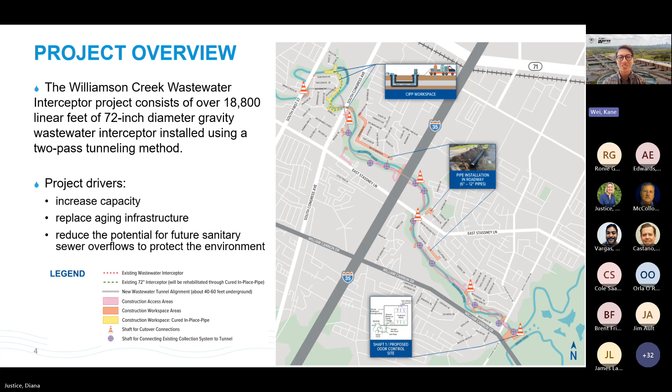Some of the major project components for the Williamson Creek Wastewater Interceptor are, again, excavation and support of 18,800 linear feet of a two-pass tunnel through rock formations of Taylor Group, Pilot Knob Group, and Austin Group. With that tunnel will be an installation of 18,600 linear feet of 72-inch fiberglass reinforced polymer mortar pipe, FRP pipe, and then 200 linear feet of 84-inch to tie into the existing tunnel there.

There will be 6 operations and maintenance shafts finished with large diameter precast polymer concrete manholes. About 10 connection shafts finished with fiberglass manholes, and this will be to allow for tie-ins and reconnections of the existing local collection system into the new tunnel. And then 1 downstream connection shaft with a structure on the 84-inch Williamson Creek tunnel. So that's the 200 linear feet of 84-inch tie-in that I was referencing.

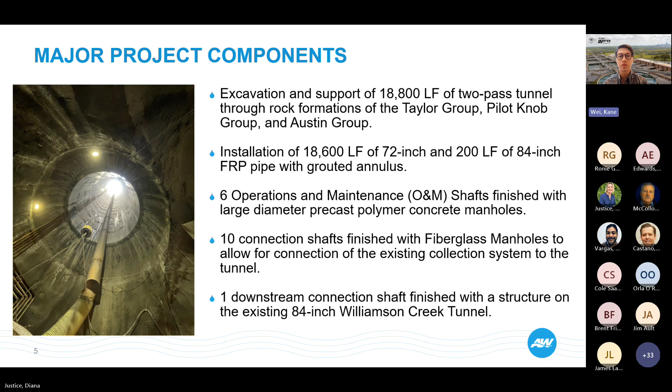The tunnel is anticipated or proposed to be about 40 to 60 feet deep, just depending on where you are. Those are the depths that we're looking at. Next slide.

Some other major project components aside from the tunnel is the pipeline installation of these cutover reconnections I was mentioning. So we do have upwards of 20 or so different cutover reconnections that we have to make to provide service to the local sewer lines.

There's a combination of construction methods from open cut and various sizes from 8-inch to 48-inch, as well as jack and bore propositions for jack and bore construction for 12-inch and 54-inch lines. And this includes furnishing the manholes, bypass pumping, and other utility adjustments.

We also wanted to highlight there's 2 large vortex insert structures that'll be used to take flow from a higher elevation to a lower in the same manhole. So please be aware of that.

There's also included in the scope removal and abandonment of existing wastewater pipelines and manholes in the creek. So you can see in this photo on the right-hand side that the existing interceptor as well as the existing wastewater laterals that tie into the interceptor often are exposed, or the encasement is exposed, or we have exposed manholes.

So with the proper removal of this abandoned infrastructure, we want to go in and clean those up so the creek can sort of be restored. And so that's included in the project scope as well.

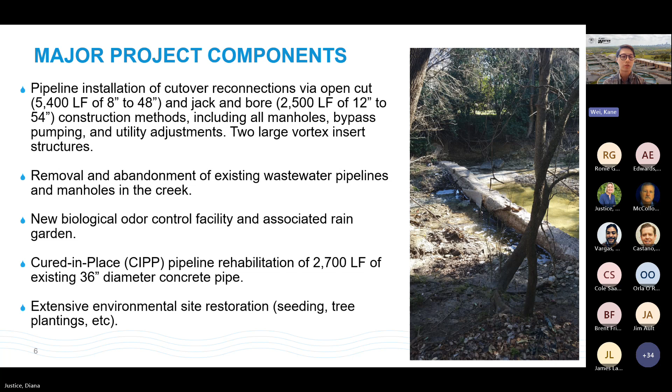And then finally, a large amount of environmental site restoration, seeding, tree plantings, things of that sort in the riparian areas, as well as offsite tree plantings to satisfy our tree mitigation requirements. Since most of this work is happening within the creeks, we are desiring to do a proper site restoration of that as well. Next slide.

Some other construction considerations for this project. Like I mentioned, the project is located primarily within Williamson Creek, and so there is a large use of easements on private property as well as parkland, and most of that access is not paved, and so we'll have to factor that in to get into the site for construction, as well as abandonment of some of the existing infrastructure that we're taking out.

There's also a good amount of community involvement that we've garnered for this project, as well as heightened attention on use of parkland and certain historical watershed buyout properties. And so there is a certain public perception, and we're trying to work and partner with the community here to improve the infrastructure. But this creek has neighborhoods, apartment complexes and buildings adjacent to the creek and the work sites. So that's just something that we want to point attention to.

Along with that, there are some other public projects nearby, things like storm drain improvement projects, trail projects. And so we've coordinated during the design phase to factor these in, factor in restoration of any impacted projects. And we've tried our best to not affect any timing of those projects, but there is a chance that some projects may occur simultaneously, though we don't anticipate any major conflicts with the schedules of those other projects.

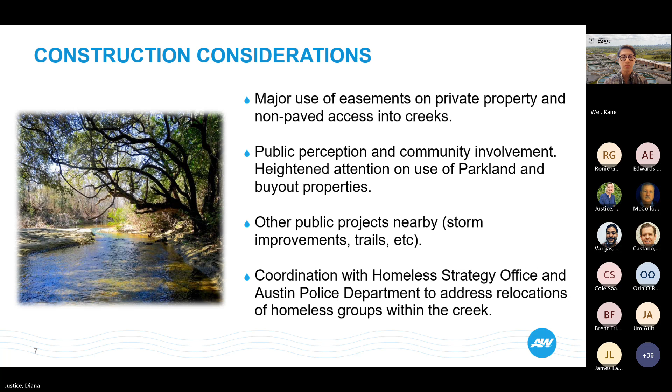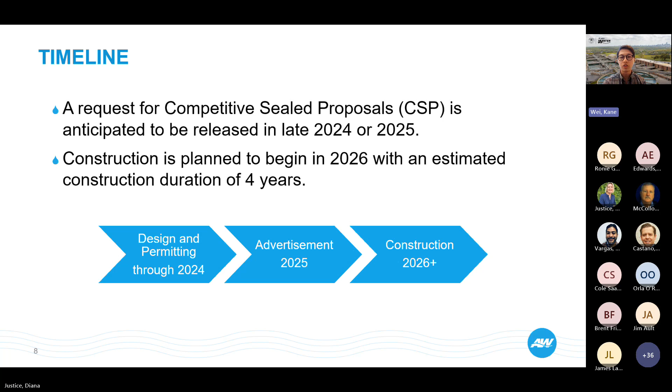Here's a timeline for our project. We're currently in final permitting stages right now and anticipate that to occur through the end of this year. And then a request for competitive sealed proposals is anticipated to be released later this year or sometime in 2025. And then construction, we're planning to begin in 2026 with an estimated total duration of 4 years. Next slide.

And here's the website I was referring to. It's www.austintexas.gov/WCI. And on that site, it's public facing. It has project details, maps, and exhibits that we've shared today as well as in the past. We have past presentations on there, and this presentation will also be uploaded on that website.

One thing we're really excited about is sort of a virtual site visit. We've flown a drone over most, if not all, of the surface access points, the cutover connections, the shaft site locations. We've flown a drone over during the summertime and in the wintertime. And so we have a sample video here if we can play that.

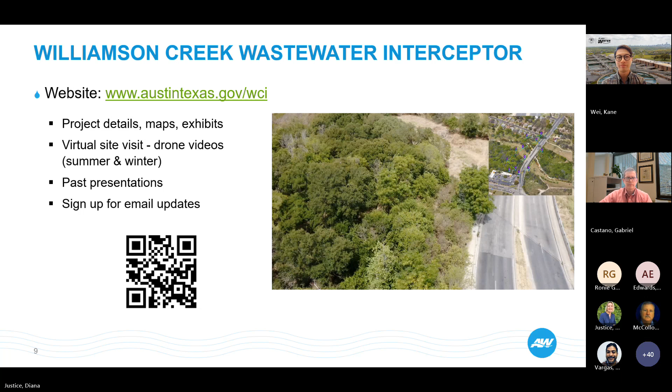Thanks, Kane. As stated at the beginning of the presentation, my name is Gabe Castano, and I'm a project manager with Capital Delivery Services, and I'm also the project manager for the McNeil Drive Water Transmission Main project. Steve Vargas, he's on the call, is the Austin Water project sponsor for this project.

So just to remind all the viewers, these two projects that are being presented at this open house are separate and will be bid separately. But we're utilizing this time to make contractors aware of these two City of Austin opportunities that will be going out for bid soon. Next slide.

So the McNeil Water Transmission Main project is located in the northwest area of the City of Austin, off US 183 and Palmer Lane. We're planning for the construction of 8,500 linear feet of 72-inch diameter pipe, either steel pipe or PCCP, constructed by tunneling methods with one launch and one retrieval shaft.

Currently, the project status is we're 100% complete with the design. We're just waiting for our general permit, so that way we can go to our financial services department to solicit this project. Next slide.

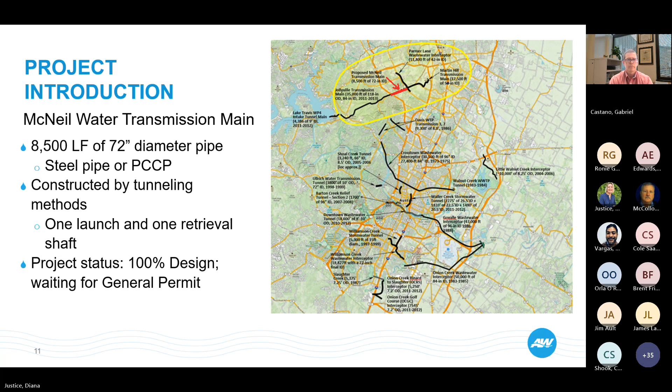So what is the project motivation? Well, this project will eliminate a constraint between the Handcox Water Treatment Plant and the Martin Hill Reservoir that are located up there in the northwest area of the City of Austin. We're also going to be replacing a 36-inch pipeline between US 183 to Palmer Lane along McNeil Drive with a 72-inch pipeline. We will remove bottleneck issues and provide system improvements.

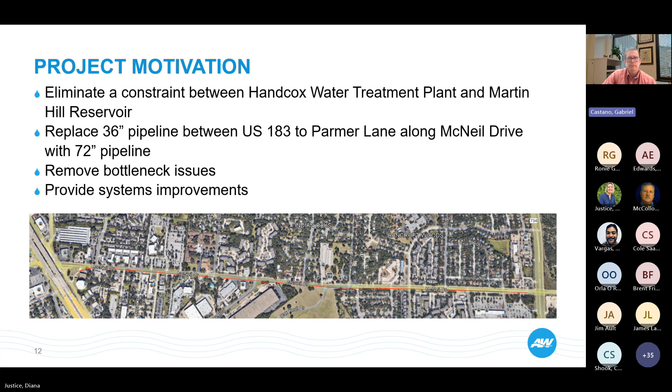And you can kind of see an aerial, a little red line that indicates where the tunneling will be occurring along McNeil Drive. Next slide. So here's a little bit closer look at that area. You'll also notice that there's been other tunneling projects that have occurred in this area. So this is not a new area to tunneling. We've done a lot of successful tunneling projects for Austin Water in the past several years.

So this is a horizontal tunneling alignment within the City of Austin right-of-way along McNeil Drive. Contractors that would like to access this area can drive down McNeil Drive to take a look at it. I'll have some more photos of the Jollyville Reservoir site in a second, but the tie-in locations are the Jollyville Reservoir site, which is on the west side there, and then the Martin Hill Transmission Main, which is a 54-inch pipeline there on Parmer Lane. And as I stated, there's 3 previous tunneling projects that surround the future McNeil Water Transmission Main. Next slide.

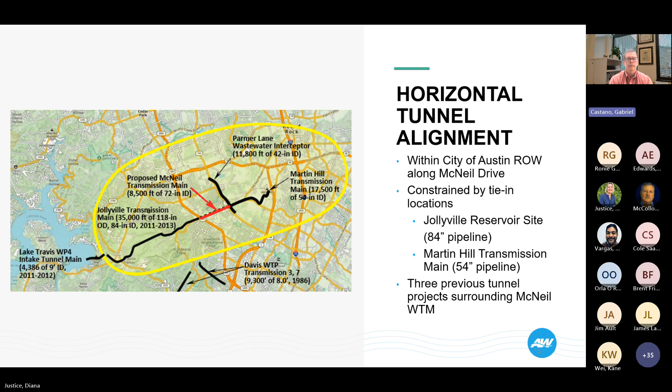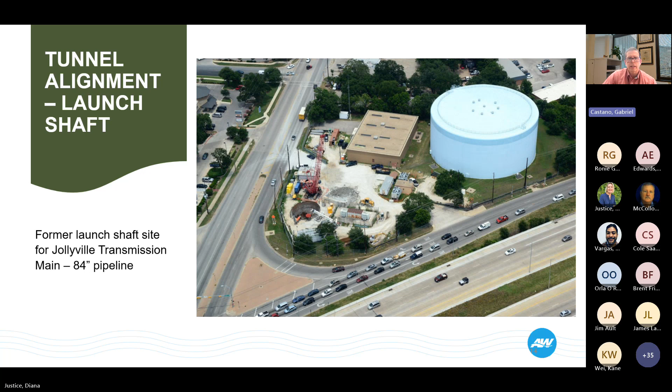And here's an aerial of the Jollyville pump station right off US 183. You can see it. Obviously, we've actually had a tunneling project start at this location before. It was a former launch shaft site for the Jollyville transmission main. So you can drive by this location if you want to take a look at it. Next slide.

And this is where the retrieval shaft will be, off of Parmer Lane and McNeil Drive, the former retrieval shaft site for the Martin Hill transmission main 54-inch pipeline. Next slide.

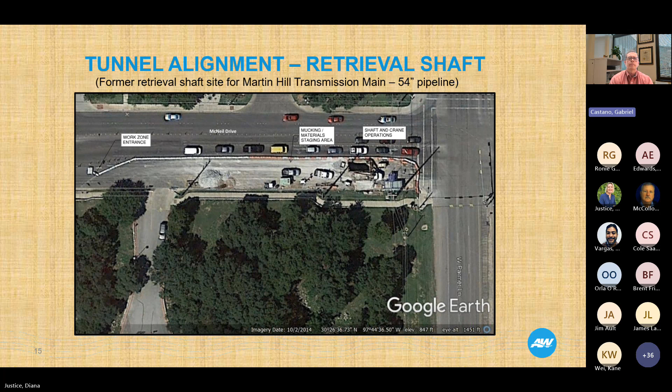And this is where our proposed laydown yard is going to be, at the Martin Hill Reservoir site. It's owned by the City of Austin. It's approximately 1.7 acres that are available, and it's about a 13-minute drive from the laydown yard to the launch shaft. And you can look at this from Google Maps, or you can drive by this location as well. Next slide.

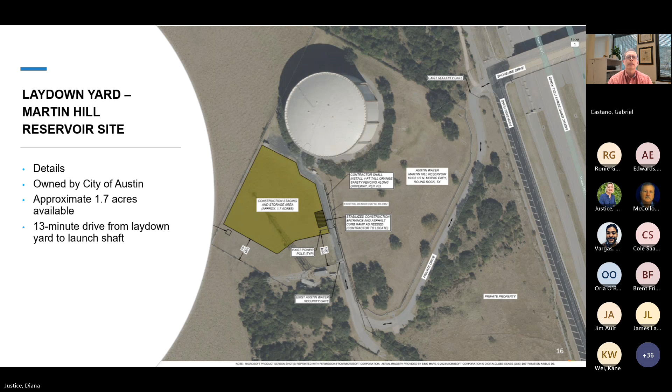So, some construction considerations for this project. We're within the Edwards Aquifer Recharge Zone. This is an environmentally sensitive area. There will be groundwater mitigation methods and karst feature mitigation methods that will be required. There are restrictions at the retrieval shaft, McNeil Drive and Parmer Lane intersection, to mitigate traffic impacts.

And the available launch site location is small and congested, so a laydown yard is being provided. And then also the small diameter piping connections at the tie-in locations. Next slide.

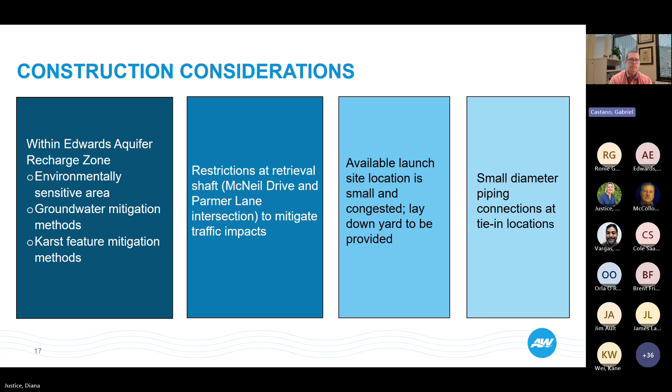So, anticipated timeline. We anticipate this project going out for bidding and solicitation in the fall of 2024, right around the corner. So please keep a lookout for this. And we're going to be using the competitive sealed proposal method for this. Then we anticipate in spring of 2025, once we get through that bidding phase and notice of award, we'll obviously have to go through city council and so forth to award the contract. So we anticipate that in early spring 2025, we'll be able to issue notice to proceed.

Design and permitting, we're close to finishing that. The permitting should be completed at the beginning of the fall. Advertising should be ending around spring 2025, and then construction starting around that time. Next slide.